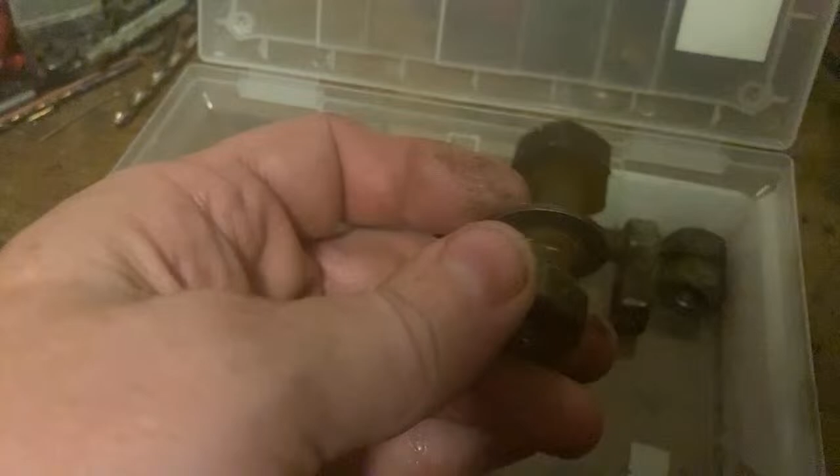These are - this is in Dan's million dollar storage system, must have cost him a fortune. I'll take it back to him because he's got a set of them now, I'll have to build in a shed. But this is BS 109 Whitworth from before World War II.

This one's smaller size - that actual size is 7/16 Whitworth, which is the after World War II spec. This is the more modern size on both ends. This one's something completely random on this end, and the normal modern size on that end - no idea what that is. These are just ordinary Whitworth nuts. These are standard both ends.

So none of these bolts and nuts really add up. So what do you do? Do you sit down and make them, or do you put modern stuff in all through and say that's good enough, or make it all match, or do you persevere with what's there? I don't know, I don't have the answer.

My OCD kicks in too, I can't handle that. I really don't have a plan, but I could spend all my life just making bolts, because this isn't the only part that at the moment needs new bolts in it. There's a lot of bits. I've made a lot of them - I've got spares that I've made sitting here in different sizes all over the bench.

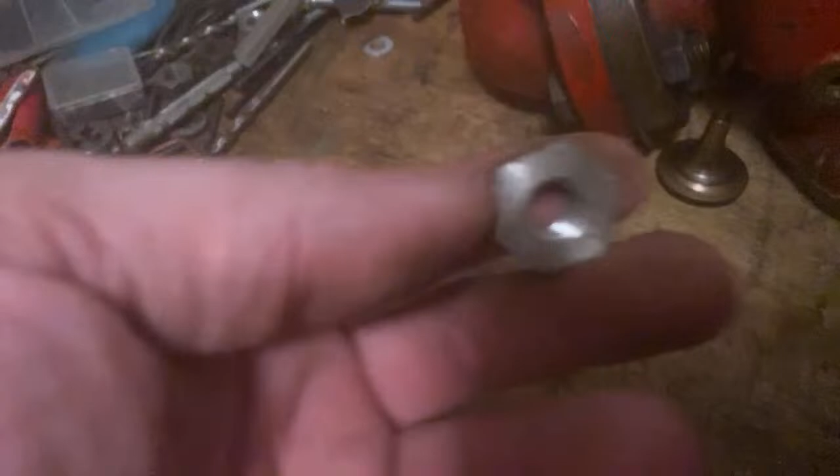This is the same as the - see this is 7/16, no, the 7/16 Whitworth and the BS 109, the old pre-war size. Hey Randy, hey Dan, we were talking about you, not to you. It's all good. So, and that's to demonstrate the point.

Have a look in Dan's million dollar storage system - you're missing one of these containers. That's what size that is - see, exactly the same.

But the thread's bigger in the middle, so they don't match. It's 7/16, that's what they should be. There's no 7/16 nuts on the rollers - they were made by mistake for something else. I don't think there's very many anyway, I've got plenty of them. But all these are 1/2 inch, so there's nothing on here that's really the same. A bit of a problem.

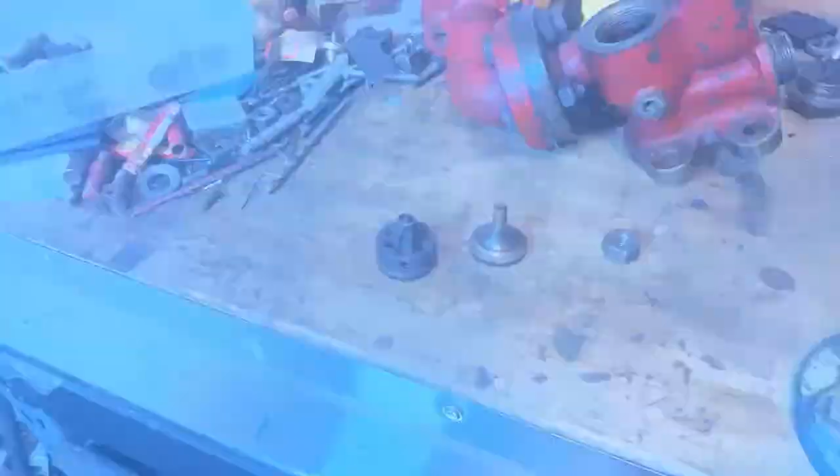Anyway, we could fix that. The issue is these - I'm going to find some light because there isn't any. Sorry guys, you're in the dark. Try that. Try that.

There's one seat still in here, and I've got to pull it - a bolt through the middle of it to pull it out. It's moved a bit, but it needs more. Haven't pulled it out yet, but this is the seat out of this side, which is the delivery side.

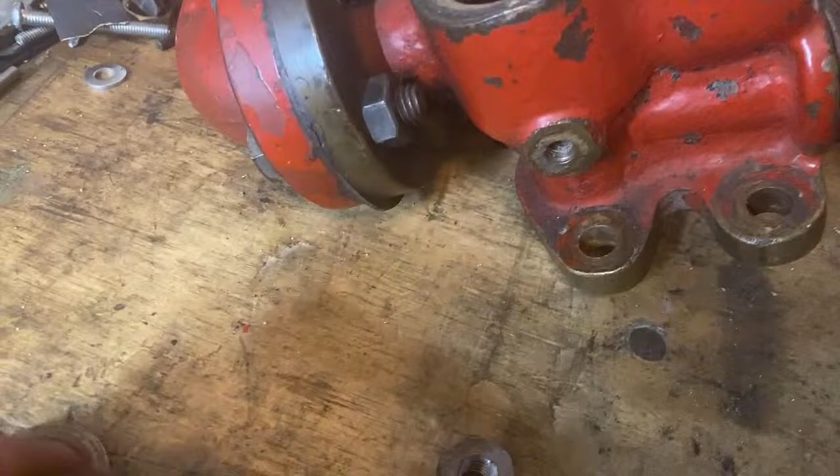It's retained with a bolt, or supposed to be, through this hole where it goes in - drops in there, and then that bolt. The bolt's supposed to look like this. This is a genuine one, thread tape and all.

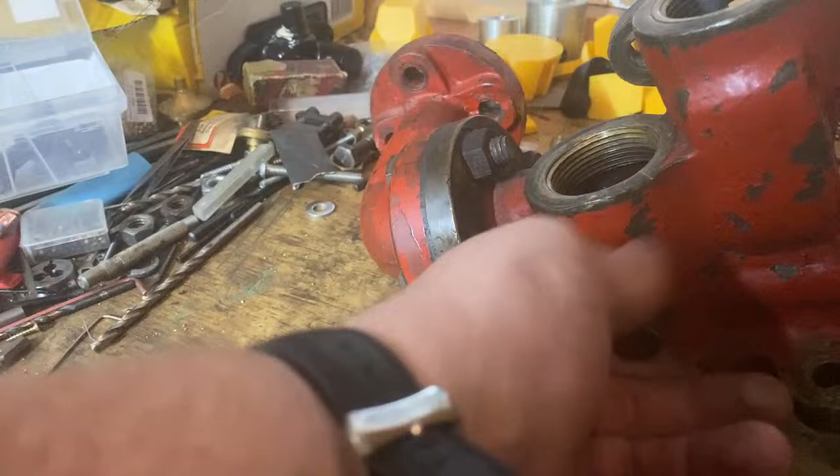What it's got is a broken off Whitworth bolt with the end chopped off, a different size head again, because no one can get this right. So I'm going to have to make one because this one never had anything retained in it. I don't know whether it's Loctited in, silver soldered in, tight, or knurled - don't know the story. Anyway, got to fix that. Make 2 of them for a start out of brass.

Now, the issue with these, if we have a look... there we go. If you can even see this. But the issue is that they rock on the bottom there.

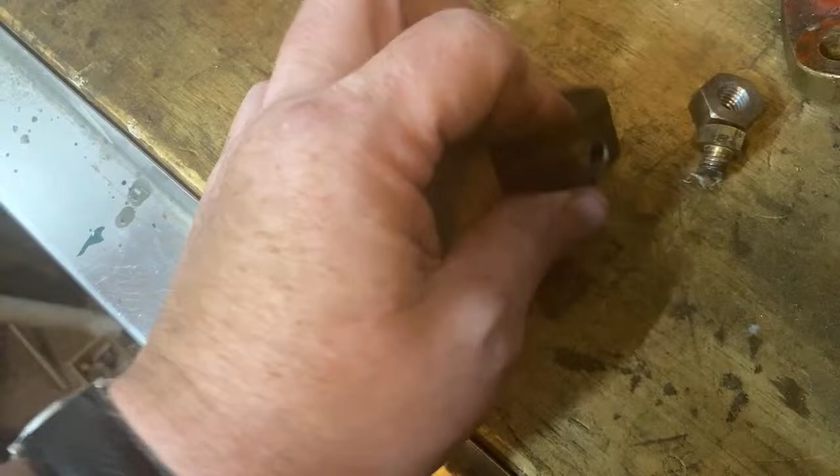So they don't actually seat properly. They sit on the valve seat in the housing on this curve here where they've been banging before they actually touch the seat. So this hole here, and this hole here - completely shagged out, completely worn out.

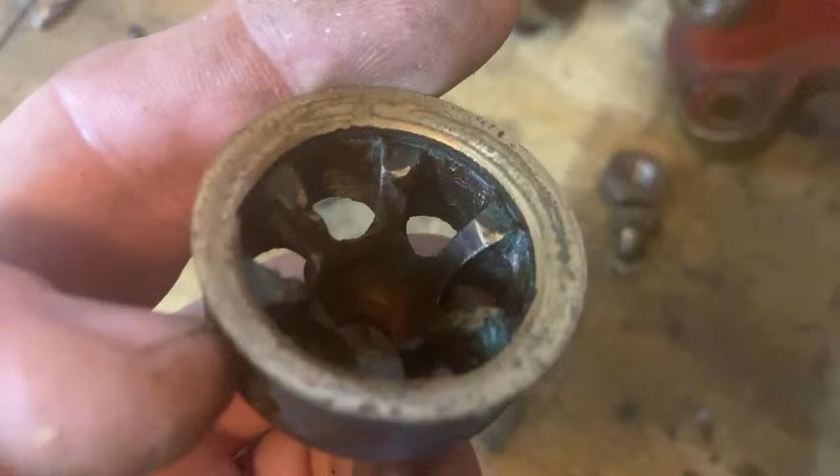Don't know if these are original or not - they could easily be, or might not be. According to the drawing this should be 1/4 inch thick on the end, and it's only about 3/16. Depending on which drawing you look at, it says it should be 9/16 high, which is about what this is, but it's flogged out - it's been belled pretty seriously on the bit that sticks up above the seating. So it's just been hammered for 100 years.

And the thing goes all the time - the steam and the roller's going, so it gets a hard life. So you need to get some bronze and make them up, two of them, and two of these, which basically have a fancy seat in the front top there.

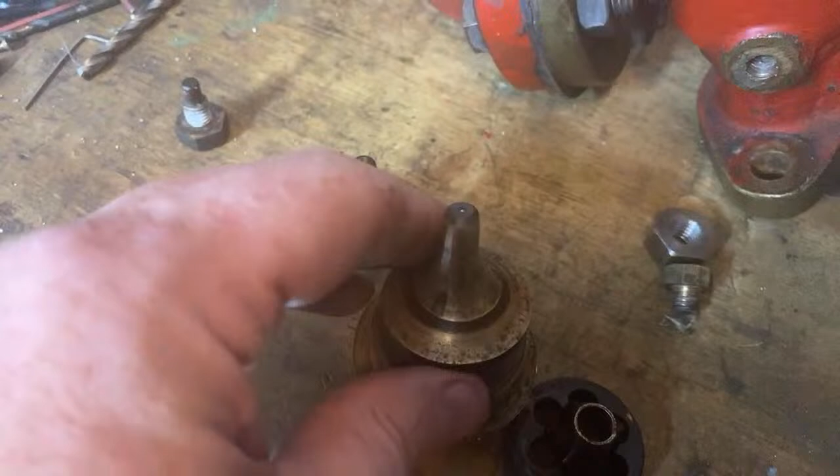So, this has this fancy bit on the end, which everyone needs, and very unlikely that everyone wants. But this is the stop - it stops it jumping up too far, stops the valve opening too far. And that's a fit on top of there, which is all very flash and nice.

As far as I know, I haven't seen them available in the UK. Heritage Steam Supplies might have them, but the catalogue's this thick, and I've leafed through most of it and found everything else - a lot of things I'd like that I'm never going to have. No point looking there because they're really expensive, hard to get, and postage freight's expensive.

I think we're going to make these new ones out of bronze. If we look at this drawing - I know you're all keen to see the drawing - here we go, this drawing: 41S54, drawer number 350.

I haven't yet, Dan, because it hasn't turned up. John Fowler and Co, Leeds. Feed pump and clack box for D1 engines, which isn't the right one, but it's close.

And it's not close enough, apparently, when you look at it closely. It's got a place here for rough tool and finish tool, doesn't say anything about that. John Fowler Company stencil, second time, and the drawing number on this end, so when you're looking in the drawer you can find them.

Yeah, this is for a D1 roller. I don't know why, but the D1 roller and engine had this pressure pot on top. That's a bit strange - I'm not sure why that is, but the rest of the bits are the same.

There's the proper tap profile - top here and side there, proper tap for the priming tap. This atrocity in here is the seat and valve drawing.

If you can decipher that, you're doing a lot better than me, because I can't. Anyway, I've had a good look at it, and a bit of a think about it. Anyway.

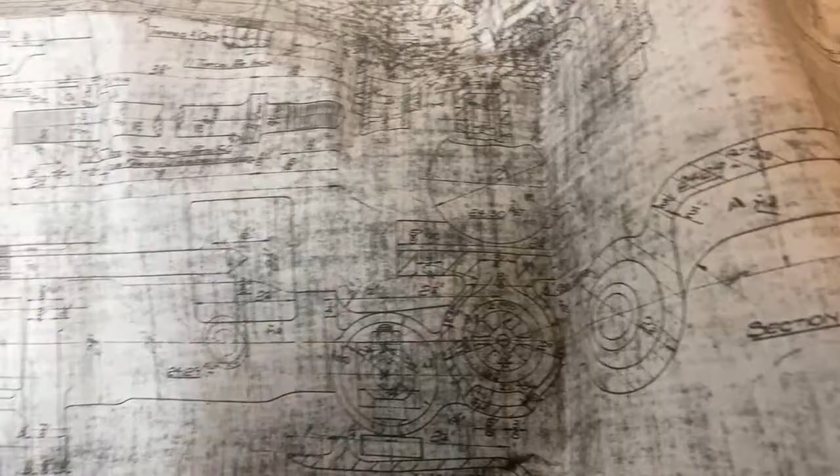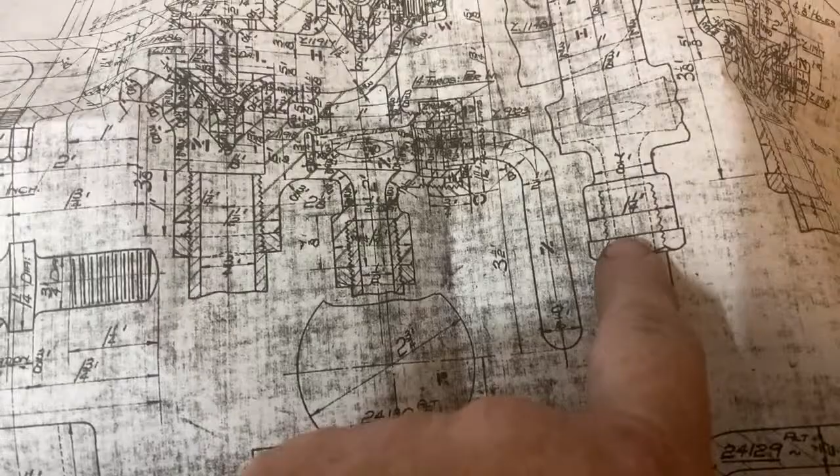So that's that. The D1's a bit different too, and there's quite a lot of differences amongst them. This one's got nuts and lock nuts and threads to connect the pipes in the bottom, in 3 places. Whereas mine has 2 flanges, which were very ugly, and we need 2 new flanges to match that, I think. And a flange on the back. Some of them had a flange on the front.

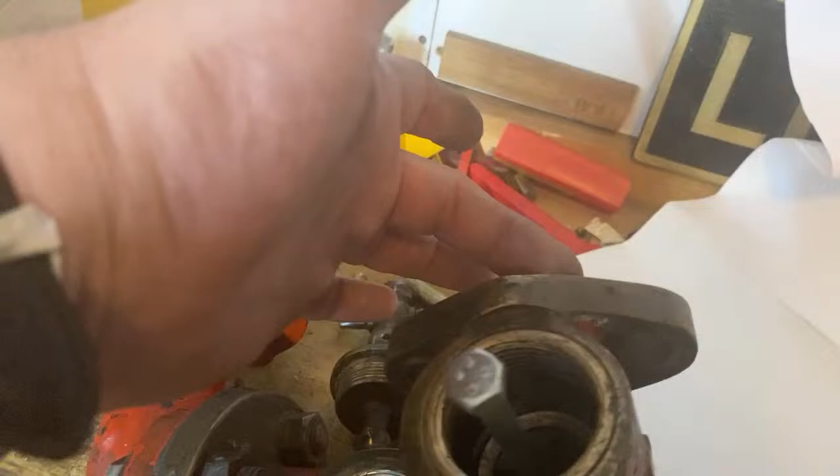If you look at Mark's, I've already got them drawn up, Mark. If you look at Mark's, the flange is on the front here, and this locking retaining screw is in this side here, or in this side probably. Now there's a passage there, so it's in this side, I think. And this bolts directly onto the back head pump that way, with the pump going that way. And then the flange on the front, I believe.

On the roller, this sits outside the foot plate, so the pump bolts on here, and the plunger's on here. Now this seems a bit strange, because I was always taught that the pump works better with less dead space in it. So having all this water in here pumping to the valve, pressurising every time and compressing, you would think would minimise the usefulness of the pump, but it doesn't because it's got this elbow on it.

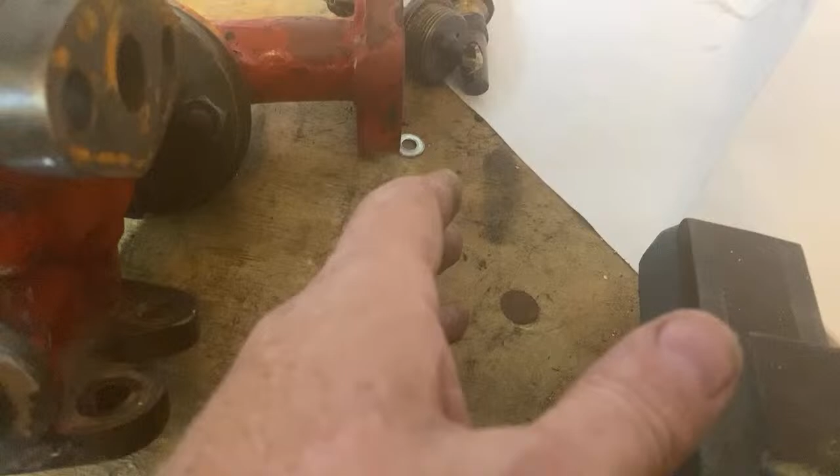So this is outside the tender, next to the gear guard. That's how that works. And this pipe here runs down the side of the gear guard. Some of these, and there was one on Facebook this week, the guy was looking for this elbow until I pointed out that it probably never had it. And when you went looking at the drawing, it goes this way on the pump. And where the gear guard is on the side outside, there's actually the diff lock control from the cab, which was another optional extra. So there's 1,000 different ones. Anyway, so that's that.

There is a bypass valve here, which seems to be in pretty good order, really. That'll go back together. That goes in there. Right, and this is off and this is pumping, basically. I'm sure you all know all about steamrollers, but what it does is when this valve is in that position, it pumps up here and pumps back down through there. So this valve's actually open in that position. It pumps through here and then into overflow in the tank again. So all it does is circulate.

When you close this so that it doesn't circulate, it actually pumps against the steam pressure and against the clack valve down on the boiler. So it pumps out of here and then out this one instead of out that one. And that's what controls your water flow. So that's all very exciting. Anyway, there's 1,000 things this needs, none of which are particularly easy or fun. And some of them are less important than others.

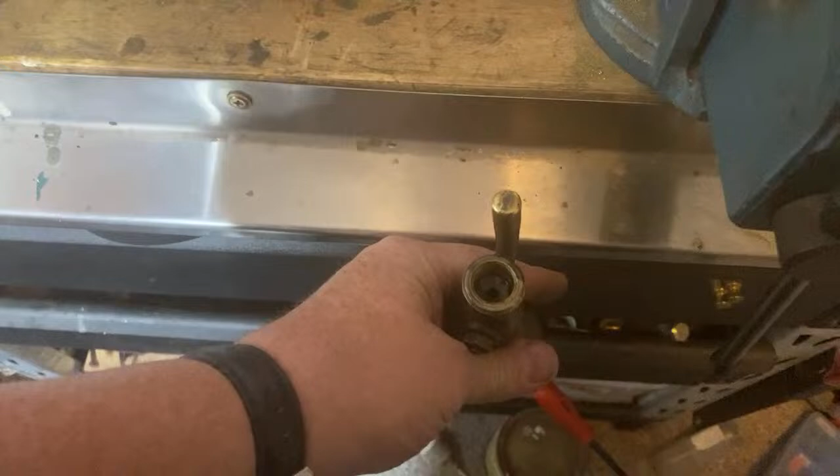This has just got a brass plug tap on here, which is fine, but it points straight up. And the position of that under the steering wheel is about here. So it's nearly guaranteed, trying to prime the pump, that the person who's steering gets wet. So I believe this should have a valve on this side and then an angle this end pointing out off the side of the tractor onto the wheel. And I think that fixes that issue. But whether that's going to ever happen, I don't know.

So that one screws in there. Now, the drawing doesn't say that this has got copper washers in it, but it must have had a gasket of some sort, so we're still thinking about that. Probably copper gaskets would be the best thing to seal these down, because they had thread tape in them and that's a bit miserable. Too much thread tape in water pumps isn't real good, and everything's got thread tape on it.

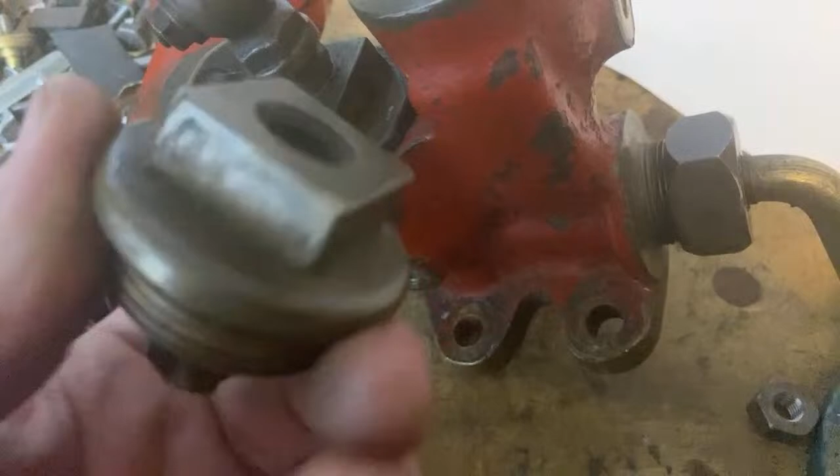So basically that screws down there, and you've got a priming tap so you can open it and remove the airlock. It used to have a chrome laundry tap, so this is much nicer. But I'm feeling like it either wants an elbow on it or it wants fixing properly at some point. So this is exactly the same part here. Now, Mark and I were talking and realised that the clack valve has one of these on it too, which is also exactly the same part. It looks factory identical. So this part in the clack, and two of these, one above the other.

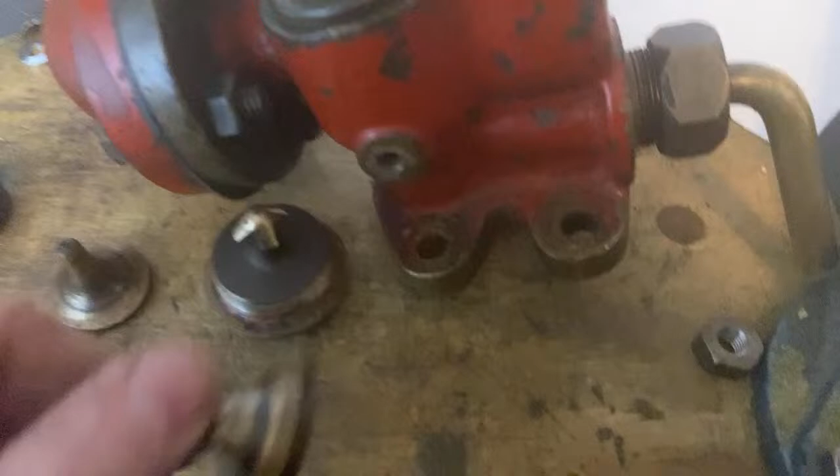Probably going to do the unforgivable and mix these up now. But the clack valve has two of these, which operate one at a time, and one of these on top. So I think they're identical parts. However, they may be identical parts for this roller, but they're not identical parts across the Fowler line, because the D1 has quite a bit different seats and quite a bit different one of these. It's a different diameter in here. And it's a different thickness here.

The clacks probably have it out just exactly the same. We'll get these done first. I think copper gaskets are probably the go. They're just not listed on the drawing. So there you go. There's 20 minutes of very exciting insight into steamroller water pumps from John Fowler and Co. in Leeds.

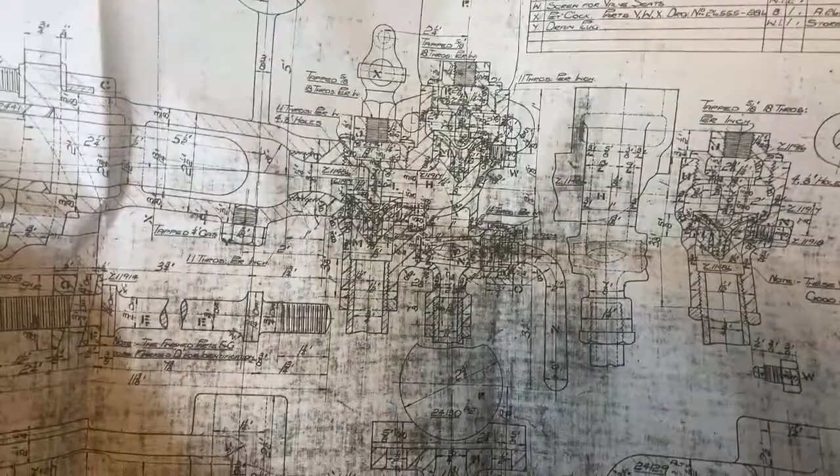And there's a whole assortment of drawings that I have access to. Most of them are about that readable. So we're still looking at that. There's the seat there. There's another view of it and the valve on top of it. But this is a different seat. Absolutely, it's got a different piece on top there. It's a different shape. Can't say it's a later model because this drawing is 1925.

But it's a little bit different. And the D1 was a different range of engine. I don't know why they didn't standardise pumps. You would think that all the pumps would be standard and you just pick one off the shelf and bolt it on. But that's not how they did things in the Victorian age in England.

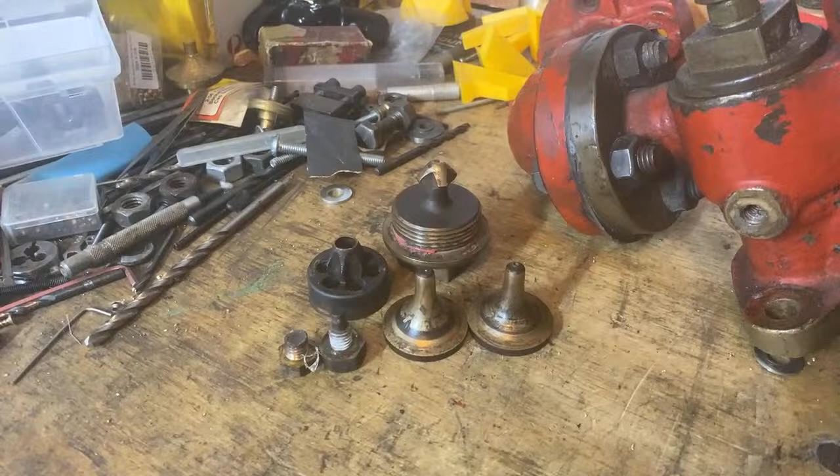Like Cole's funny picture book. There's you understood the fruit was cherry. A apple pie, yeah. B bit it and C cut it and D dealt it. I can't remember what E did. F fought for it. Anyway, you understood the fruit was cherry. Not that that's relevant at all, but there you go. Completely irrelevant.

Anyway, that's the pump, and that's where we got with that. So some of the wasps are probably too big to fit in the pipes. That's very true, but they're going to have baby wasps, and that looks like a fairly good hole for them. So, anyway.

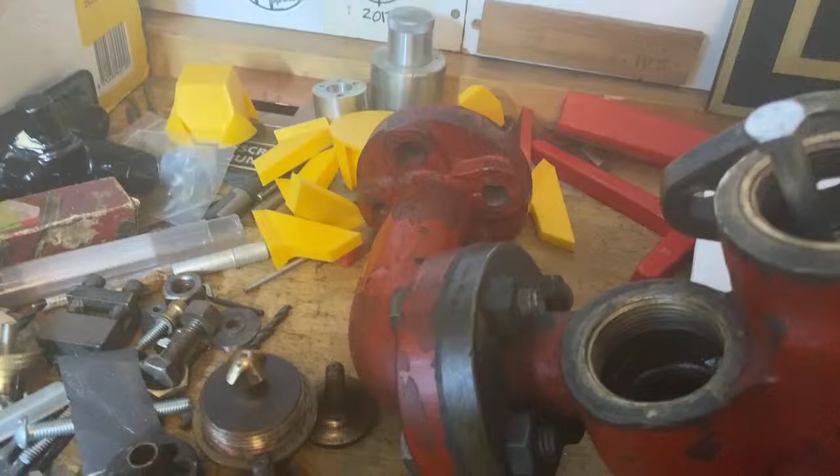It doesn't. The bottom of this seat comes into this hole. So this is the space in the top that pumps. Now it's only open to the bottom here through this one, only when the valve's open. So when the valve's shut, it pumps,

it pulls the water through this one and then pushes the water out through this one. That's how that works. So this one in here sucks the water through from the top, opens the valve. Right, when this plunger comes back, this pushes down on the seat sometimes, but it doesn't at the moment, and lifts this seat and pushes out through the top.

If the bypass is open, then the path of less resistance is down the side here and out through here. So there's no actual passage right through, so you can't just get in the back and punch it out like I did that one. I just gave that the brass punch. It fell out. So I'll put a bolt in this one, and I'll put a plate across it, and I can screw it out. But you've got to hold the 8mm nut on the bottom.

So we either need a spanner, or to weld a piece of 6mm rod on the side, which probably works. That might be an answer. So it doesn't turn, or I don't know if it does work actually, because if you get it so it doesn't turn, then it's probably not going to come through the hole and you're going to bend something. So probably the best option is to get a bent spanner that goes in there and holds it so that you can jack it out. So that's the plan for that.

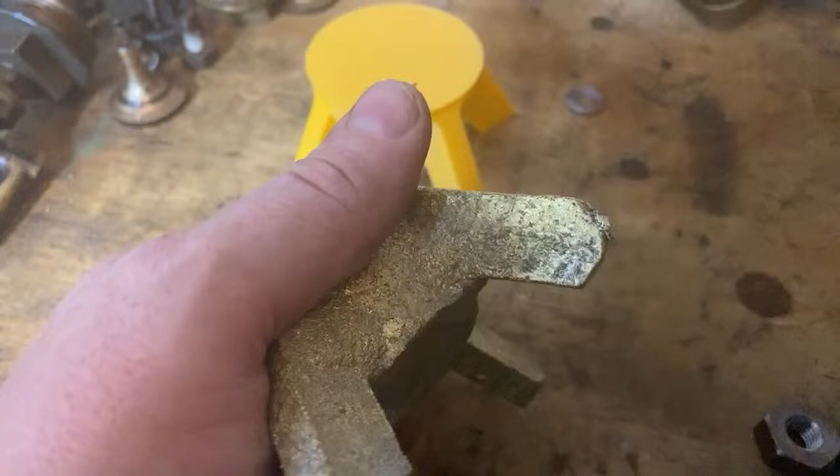Right. Dallas cast one of these at the foundry. And it's sort of alright, but it's very, very ugly, to be honest. And it's not helping steam flow or anything. It looks ugly and it looks heavy, and this is a much nicer looking thing, but even that's way over engineered, I think. And it had some sand wash out here on the bottom corners. So some of these are really sharp corners, 2 of them, and 2 of them not so much.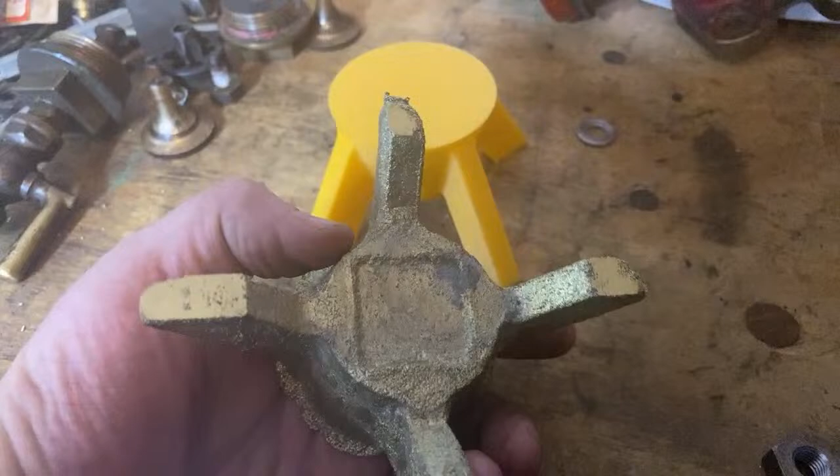And it's got this funny shape in the bottom where the pattern fell in, and there's a fair bit of clean-up work on this, and you machine this back down and drill a hole in the centre and stuff like that. You've got quite a heavy casting. It's probably half that weight when it's put together, but I haven't attempted that again. I did try and pour one of these, and I left it on the bench up there. I hope it's still there.

Got to go and get some patterns. Yeah, we're getting that, Mark. Yeah, thank you for the reminder. Yeah, we've got them here.

So, this isn't the pattern I use. This is a fairly ordinary 3D printed pattern with some layer shift issues and things. But this one hasn't got any shrink on it. The full-size pattern does have a bit of shrink on it, and it was about right because I went up and moulded this up.

I've got a slide hammer. I haven't got a slide hammer that takes an 8mm bolt. That's where I'm at.

So this is the one, see, if we look at that, this is the one with 1.6% shrink or something. So that gives you some idea how much shrinkage there is on that. Gives you some idea how much bigger the shrink one is than the actual job.

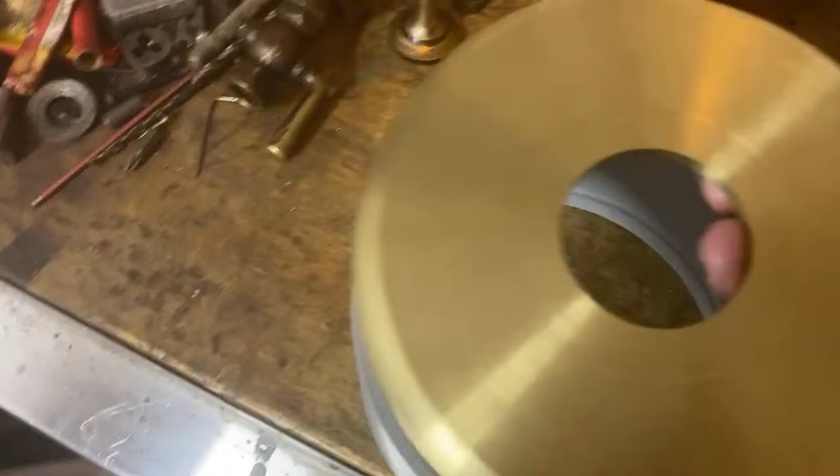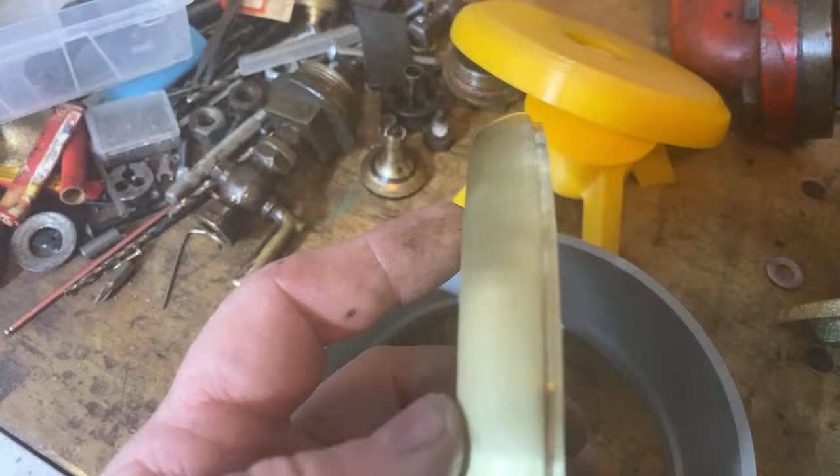So here we go. Look at this. We've got one of these, which is very nice. Right, which is exactly the same, shrink and all, really, as down to size and everything. So we cast one of these. As you can see, I've machined a shoulder on the corner there. And when we get this piece made or cast or whatever we're going to do, we'll machine a shoulder to match on the inside so they fit together.

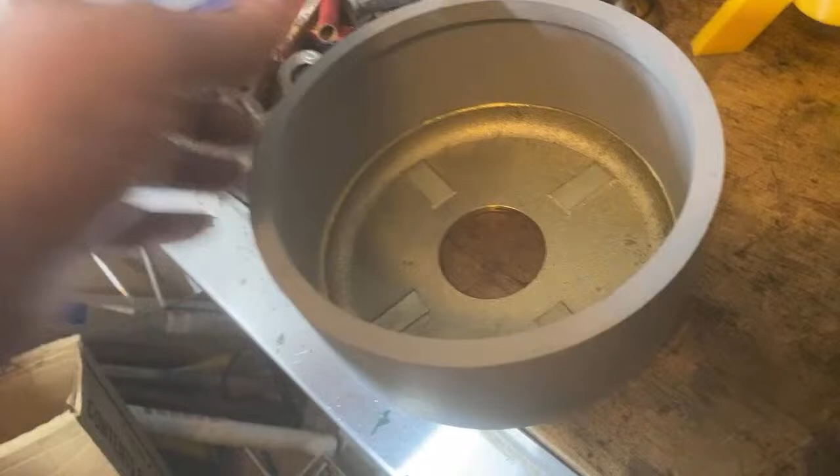And then we'll either silver solder these two together, or we'll run around it with a TIG and some brazing rod, something like that. TIG braze it, or TIG brazing is probably easy, except I'm not fluent enough to TIG braze. I know people that are fluent with it and pretty neat and tidy, so I'll get them to do it. So that gives you some idea of the shrinkage on that, because the pattern was the same size.

Mark talks it up, but I don't know. I've done enough TIG brazing to know that it's not a fun thing, and I reckon I'd be lousy, I haven't done any for a few years. But I know someone who does it all the time. We can give Mark a try, and there'll probably be 2 of these in the end, so he can do his. But rather than put someone through the stress of actually welding this up, I think I'll get another mate who's pretty good with these to do it.

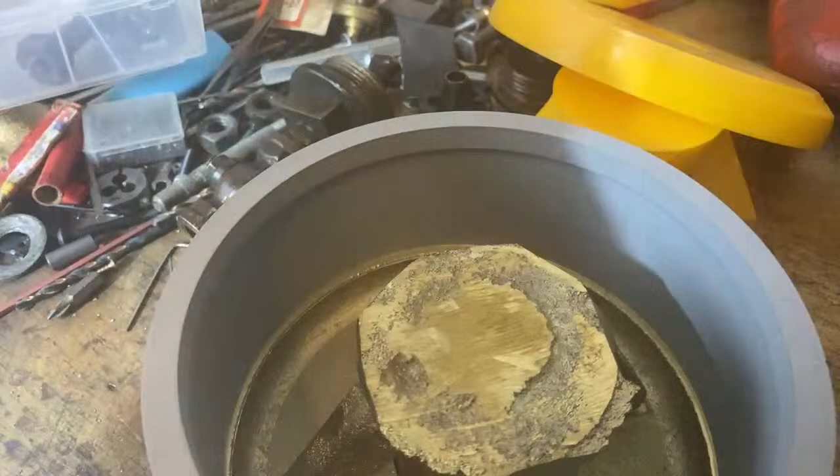So this goes on here, and this with the four pegs here goes in there, right? And then this is machined to match and concentric with this, and the reed plate goes on top with a 16th gap or something like that all the way around, and then there's a bolt down through the middle, like a big stud that screws the reed plate in place. And then the bell goes on top of that, and the nut on top of that. So that's how that works.

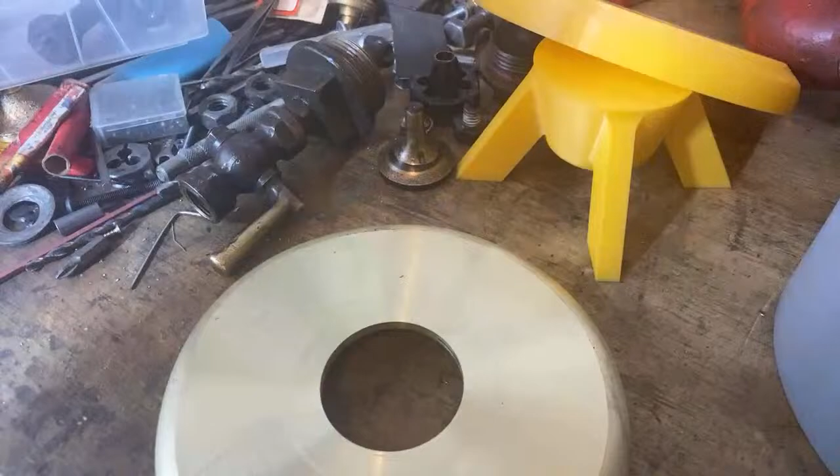So there's a valve goes on the bottom here, and that's probably the next bit. There's going to be a split casting with a core in it. Core's about toilet roll size. So we'll just use a piece of cardboard carton or piece of PVC or whatever I can find to make a silicone core, and mould both halves, then lift them out of the mould, put the core in place, put the top of the mould on it and pour that, and that should mean that we're not cutting out 1 3/4 or something in the middle of wastage.

It's going to take 2 days to do. So we can just set them up on the hexagon and bore it, hopefully. And then that can be either welded around the top or around the bottom. And threaded on the bottom, and then there's a seat and everything for the valve, and there's an opening in the side for the lever.

The lever needs to be laser cut or something, probably is the easiest way. You can cut it out of plate with an angle grinder, but I've got to get new flanges for this. Several other bits need to be cut, so we'll get this done at the same time, the lever and whatever else needs doing. Get someone to plasma cut them, whatever.

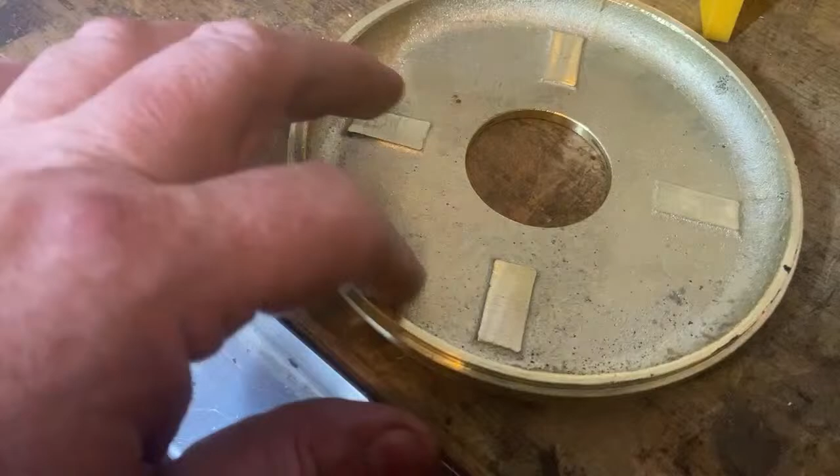So that's progress on that. There's actual progress. There's an actual part that's starting to look like a part, which I'm really pleased about. And this is a really nice casting. It's finished up pretty nice. Poured in here pretty good. It's the second attempt at this. The first one collapsed. Put the top back on the mould and it just fell in. So when we poured it, it had a big hole in it. Not good. But this one's run beautifully and we've got a really nice casting.

There was a fairly big gate on here where the metal poured in, and then we just put a series of air vents, like bike spoke size, into the top of the casting so that the metal flowed all the way to the back and came up through. And a big gate on here, which I've actually machined off on Tuesday afternoon when I got home.

So what I did was set this up on the inside here, because this is a good finish, in the four-jaw, and bored this face at the back. Then set that up on the outside of the three-jaw chuck, nice and tight and firm, and flat against it, and machined this flat and machined all this edge, turned it round and machined this radius on here. So everything's cleaned up pretty nice, pretty happy with that.

So that's that. Pouring this is going to be a fun thing. I don't know really the best way to do this. Probably we could put, it's not on the drawing, but probably we could put a little bit of draft on here on the inside, facing up to the top towards this lip, which needs to be machined.

I'm still not feeling that. I mean, while you'll pull it out of the outside of the mould, pulling it out of the outside without the sand caving in and still being able to clean it over, because when you tip this over to clean it out, the middle here being not particularly well anchored to the rest of the sand, just falls out. Then you've got problems.

So casting it, when you do it in 3 bits and then make a wooden mandrel and some tie wire around it and then weld it in 3 bits and then machine it, that might work, because that way you've only got sort of that much depth and you can lay them down on their side and do like odd side box. So if you're casting, say, that much of it, a third of it, you could sit that in a box and then

put the sand in nice and tight on top of it, turn it over, clean this out, and then put sand in nice and tight on top of this, with a parting line, so that when you lift the top off, this piece in here lifts off as well. Then when you pull the pattern out, you've got a gap there.

Would it roll down? No, it's not cost effective. That's the thing. Because a piece of brass that's 65mm wide and 3/16 deep, and then you're still going to make a ring to go in it as well. This bit of brass for this is going to cost me $150, whereas there's probably, seriously, $10 worth of scrap brass in it. And if I stuff it up, I can throw it back and use it again.

So I don't think that rolling it up's the answer. I thought about it pretty seriously, and it'd probably be alright, but getting the diameter and everything right with the nice round ends and nice and uniform, I'm just not feeling like that's a good idea. I've thought about it, not feeling it. So, open to other suggestions.

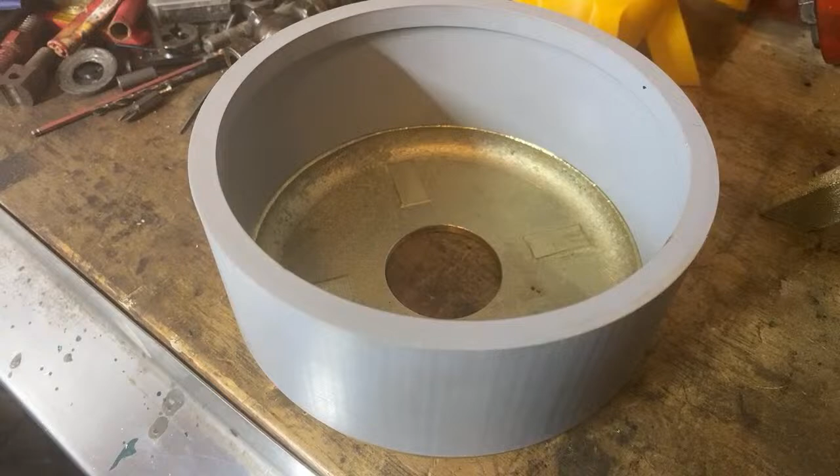You could pour it open, yes. However, a bit less controlled, to be honest, to pour an open mould in brass. Yes, it will sort of work. You've got chill where it goes around corners, it's a bit more extreme, things like that. I'm not sure I'd like to try it, not on this casting.

It's very easy to make a box, just mould a box on a square so it's flat. I put it on a piece of plywood so it's flat, and if this is all sitting up nice and flat and level, you can just drop that piece in. But what you do is put the core in, put the pattern back in, mould the box on top, and then you've got the right shapes and everything. When you pull it apart, you can see where to put gates and things.

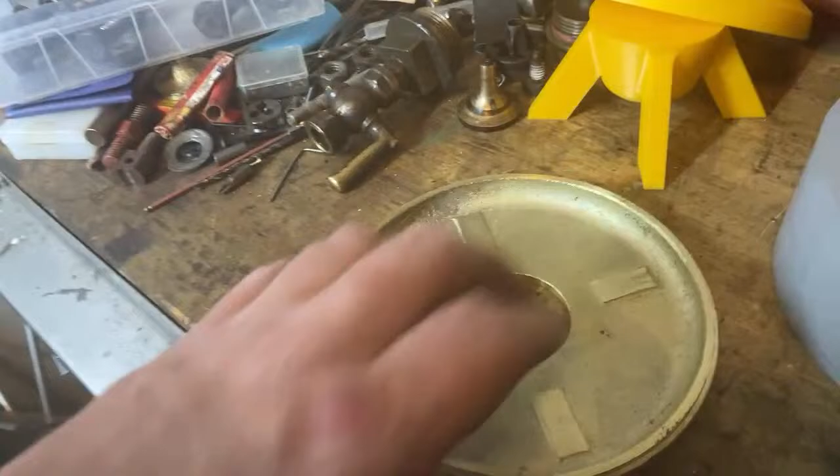So that's where we're at, that's sort of the next job. Probably it's not actually, probably the valve's the next job because that's a very easy job. It's the fitting on the bottom. It's a fairly easy casting and we can make it. It requires minimum machining, so we might do that next.

Got to find a piece of cardboard tube for a core so I can measure it and make the pattern with the appropriate size core prints. There you go. Probably I've got something the right size here, like probably a box of these, which is a mailing tube. That's about right. Probably just cut a piece of mailing tube and use that. A piece of PVC pipe might even be better because it's smooth and the core comes out a lot easier. Split it down one side so you can separate it, or split it in half and put some rubber bands around it.

So that's that job, that's the things that are going on. I said I wasn't going to start this, it was just going to be a concept. However, there you go. I'll get this bottom fitting and all the bits made, the valve and the reed plate and the outer housing and the stud and stuff, then we can think about the difficult bit, which is the bell. Oh crap.

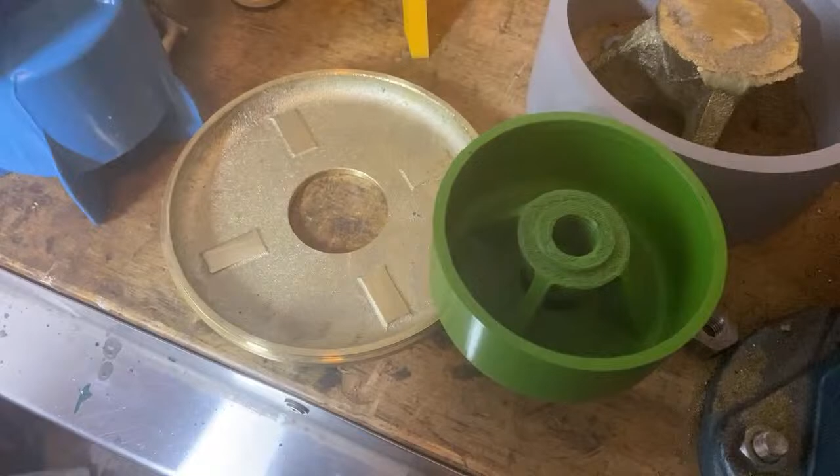This is 1/6 size, so you can sort of see the size comparison there. 60%, not 1/6, it's 60%, so that's 6/10 size. So that's the fitting on the bottom with the gap in it.

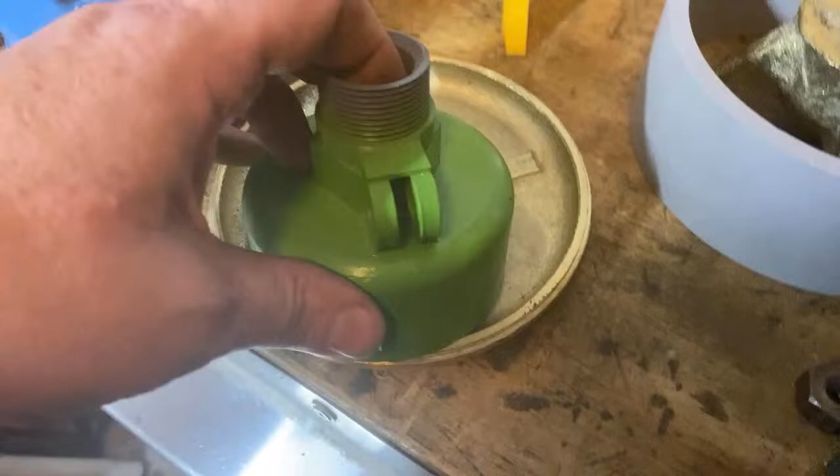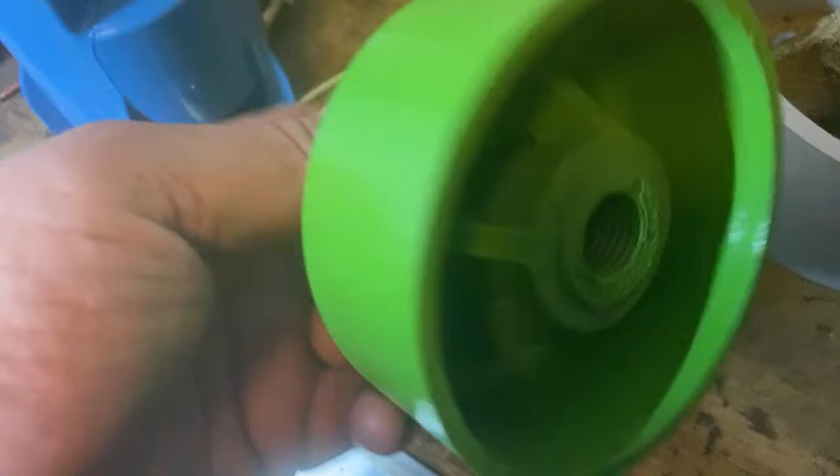Not going to bother putting the gap in it, I'm going to machine this solid with the core through here. I'll cast it solid with the core through there, and then we can grip this in the 3-jaw hopefully and machine all this nice. Set it up that way, or set it up nice and flat, bolted down or something in the vise, or even this way, and we can machine through from the top and put this in here before we weld it together. Then you've got a nice square gap, and less problems with chatter and stuff when you're trying to hold it and machine it.

So anyway, after that is this bit, and that's going to be the challenge, right? Because this is 6/10 as well. But there's some interesting challenges in that. I don't know whether we're going to cast it or fabricate it yet, we'll see how we go. Might have a couple of goes at casting it, and if it fails, we'll fabricate it. But that's one of life's little challenges, I think.

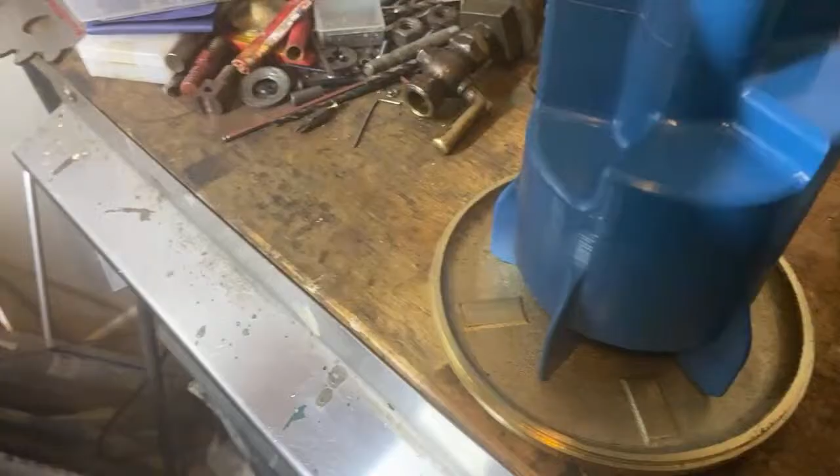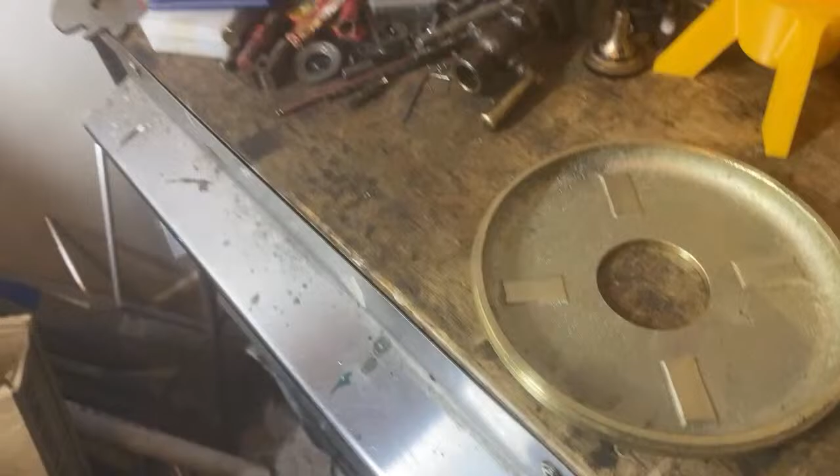Anyway, so we've got one of them. Called in and saw Mrs Mark's shed on Tuesday on the way up, because they live up near there, on the way back. She's done some very cool... what have we got here? It's fluff, don't think it's spiderweb, it's fluff. She's done some shirts with an embroidered patch on the front and an embroidered patch on the back, which is really nice. So pretty happy with them actually, pretty cool.

So that's another thing I picked up on Tuesday, pretty excited about that. So I got some work shirts, they're only cheap Kmart shirts, but comfortable tees. That's done, thanks to Mrs Mark Shed for that.

I'm interested to see if the 3D printed version would work too. There's quite a lot of metal parts needed before that happens, like a screw through the middle and stuff like that, and probably it would, to be honest. But probably not a big deal to get it to the stage where you can test it, and I might do that yet. So if we were to basically put the reed plate on, make a steel bolt for it, or even a bit of all-thread if we could find the right thread. I don't know if we can, this odd thread.

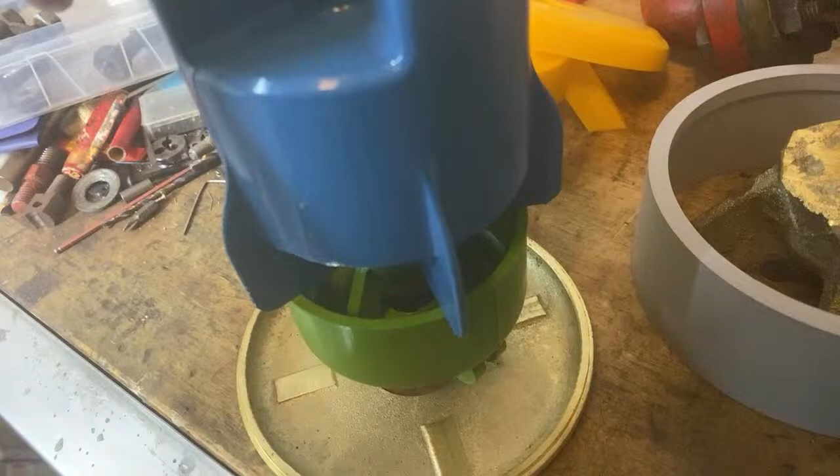Up through the top, nut on top. Then we could probably test this and see if it actually gives a note, which would be interesting. I'm more likely to do that because Dan's bought one from America, a little chime whistle, and that works fine, you can blow that and make a nice sound with it. It works well on air pressure, and I'm not sure on steam pressure.

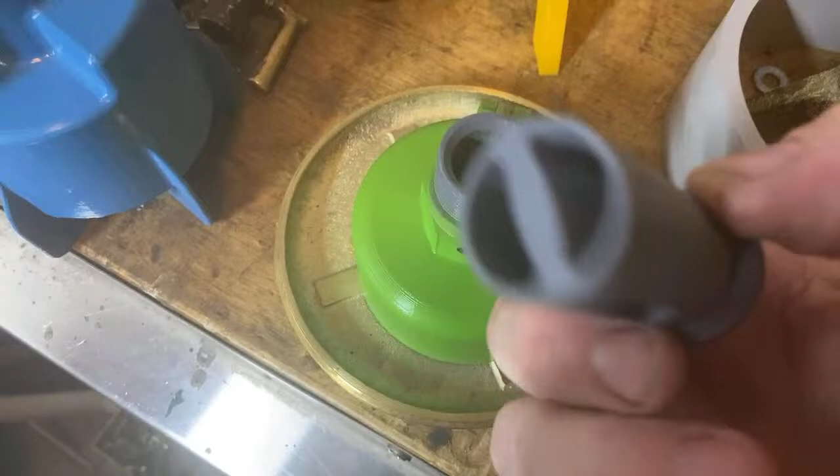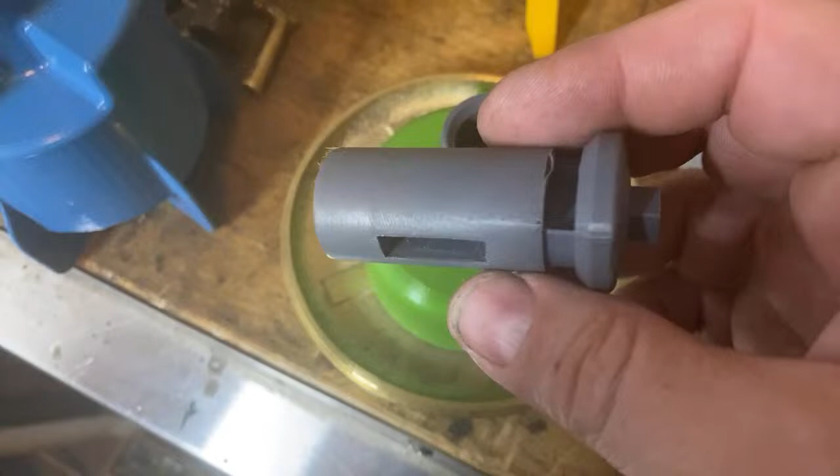Also need this bit, which is an interesting little casting. It's got some fairly interesting cores in it. That requires a little bit of thinking about, to be honest. Not sure. I think you make that in one piece with a gap through the middle, so you make a core box that the middle slides out of. So make this to fit the hole, with this piece in the centre, which is actually banana shaped on each side, so it's got a curve there and a curve there to clear that. So make that piece maybe.

So I'm not sure, I've really got no idea about this, but the steam delivery passes this valve here, which is the valve seat. That's what stops it. This lever in here works inside this slot, and that's what lifts it off the seat. And when it lifts it off the seat, the air or the steam goes past there, through there, and up through the top. So there's some little challenges in this as well.

And then this is just bored, and this is machined to fit with a 45 seat. It's got a square on the end to lap it.

So, not even sure where we're going with that, or what we're going to do, whether we're going to fabricate it up. Maybe that's probably the easiest. No idea. Take care, Paul.

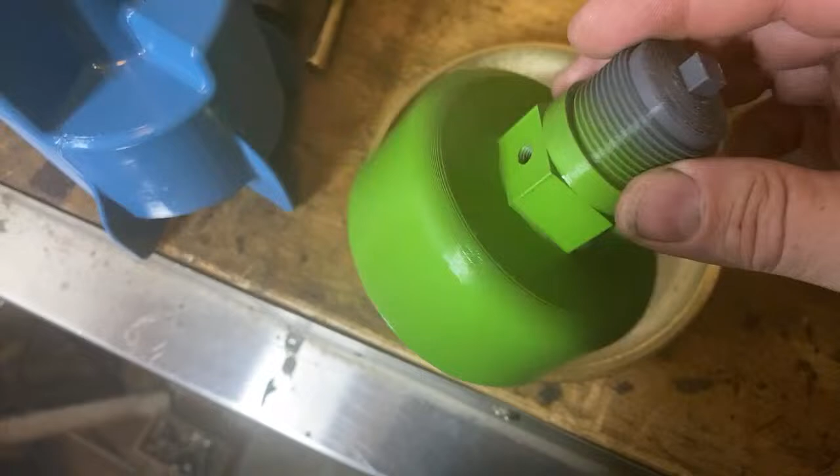Interesting. That screw there retains in that slot, so it stops it coming out or falling out or whatever. Limits its travel.

So, don't know. That's the genuine consensus on that. It's all pretty much suck it and see, excuse the pun. But got no idea. We'll see. But we're making a start because we've got a bit there that's made a good start.

If we can get this bit, make a decent pattern that actually works for this, and cast another one. Probably quite a bit lighter than that. I don't think it needs to be anywhere near that heavy. That's heavier than the rest of it put together. This is solid. And there's some really ugly edges and things here where it's all falling apart. So, going to have to address that.

What else? I've got to sweep this lathe because I've got brass everywhere here at the moment, where I've been making that, machining it up. Haven't done anything with that. I've got a toilet roll insert there that's about the right size, but it's about an inch too short for the pattern.

Haven't even looked at this, to be honest. I've got the castings there. That's as far as I've got. I'm feeling guilty because I didn't get in and do some on this because I really need to.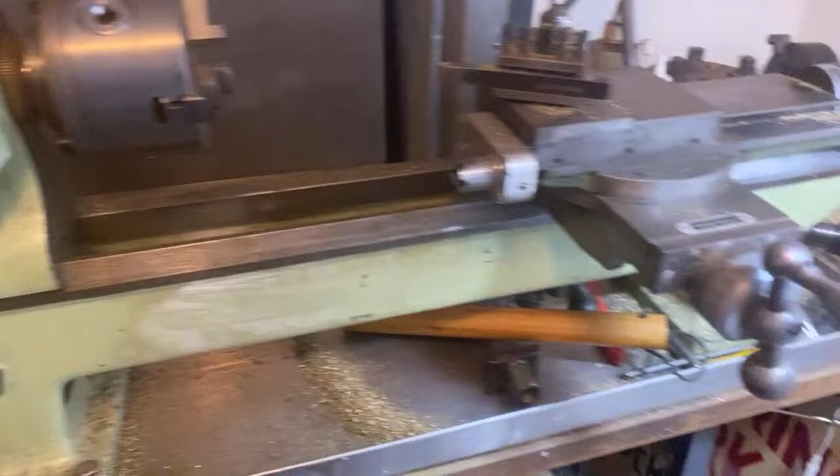Haven't even looked at any of this stuff much. This belt's done a bit of hard work on the machine, that casting, that's all I've done. Anyway, that's pretty well it.

Anything else exciting? Has anyone else got anything to share? Mark's doing stuff. Hey Mark, I forgot to tell you the other night, and I was going to have a discussion about this, but we never.

That date on the front rolls on my engine corresponds. It says March 26, which is 3 weeks or a month before the roller was shipped. So I'm guessing it is a date. And yours probably is too. So there you go. Interesting.

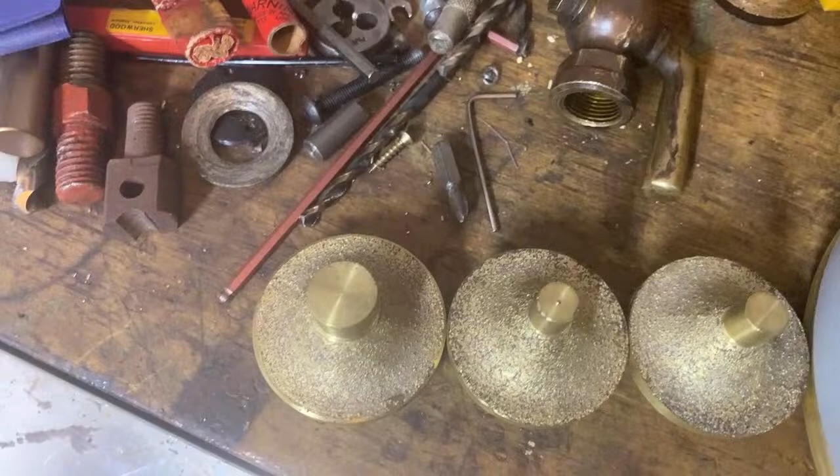What's the popping? No idea.

So I should finish them at some point while I'm doing it, while I'm in the mood, before I turn them into valves. That's brass, and it needs to be good quality gunmetal, the drawing says. There we go, 'use only' it says - I think it's a bit specific about that. If we look at the drawing, materials for valves, it has a fairly specific note. Here it is, there we go: these valves must be made of good, strong gunmetal. There we go, it didn't say anything about quality, it just says good, strong gunmetal - something with plenty of copper in it, I guess. So, there you go.

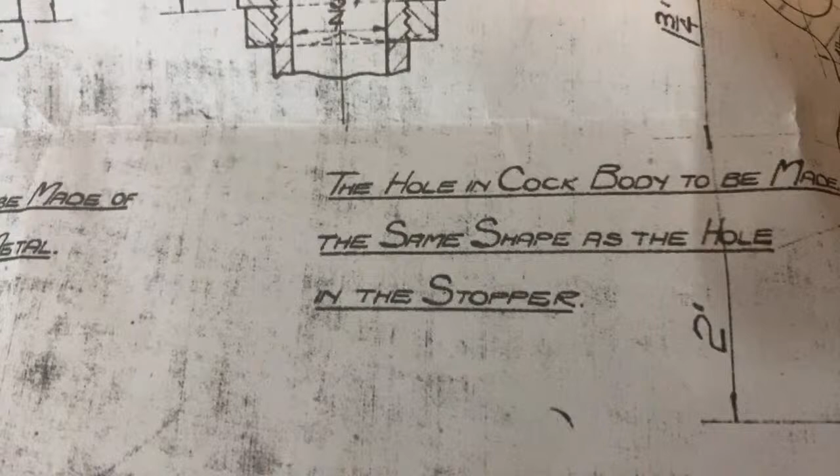If you wanted information on the angle of the petcocks and tapered plugcocks and this thing, there's that. "The hole in the cock body to be made the same shape as the hole in the stopper." That's exactly the information you need. That's all there is. That's what you got. That's it. They got a match. And I don't have the match from here to here to here to here, because when I pulled my drain cocks apart, none of them were the same taper at all, even close. So there we go.

So that's what I mean. I guess if we make a new valve for this at some point, which we might, I don't know if we will. I'm not feeling that as much as I should. We'll see how we're going for time. At some point I might make one. It's an easy job to change it over at some point in the future. But if that happens, then yeah, I guess we'll make them both the same and be done with it.

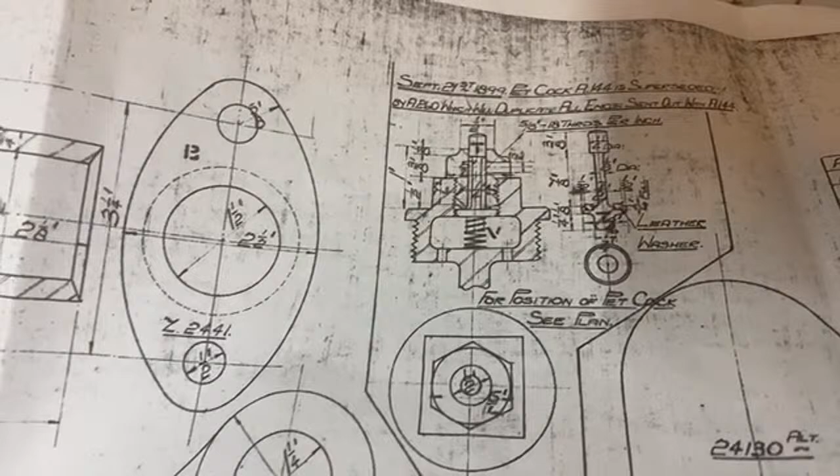This is an interesting thing for Richard Mark, and anyone else who's interested. This says September the 21st, 1899, there's a note on this drawing. It says petcock A144 is superseded by A260, which will duplicate all engines sent out with A144 or R144. So

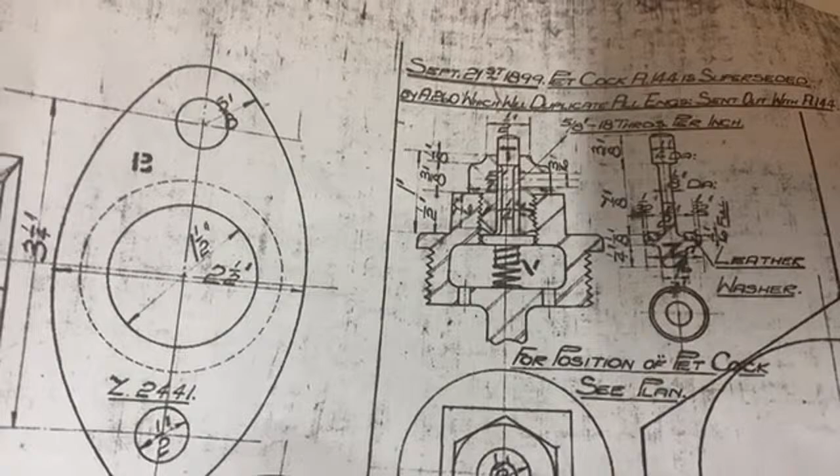there's this jigger here, which is actually in the top of here where this valve goes, right? Which is spring loaded with a button on top, and when you push it in, it lets the water pass and it shoots out the side there. That's very cool. But it's an auto closing priming valve. Not sure how effective it was or whether it leaked or what happened, because they've changed it. But that's what we got. It might have been a bit difficult to use.

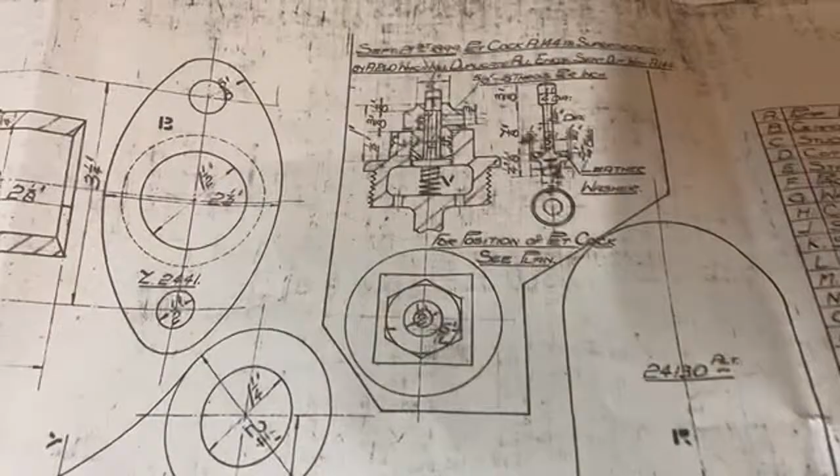It looks legible up there and it's quite good. It's not legible down here where this is. At all, even a little bit. I can see measurements like this one here says 1/8. Absolutely no idea which bit of it's 1/8. That's a bit of an inlet. This one's a 1/8 too, but it still doesn't give you the information. This one's 3/8. I think that applies to wall radius on the outside of the casting, which is irrelevant.

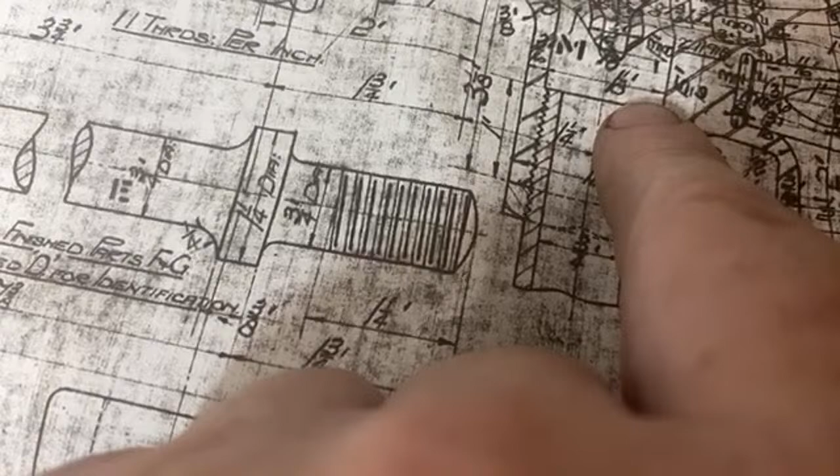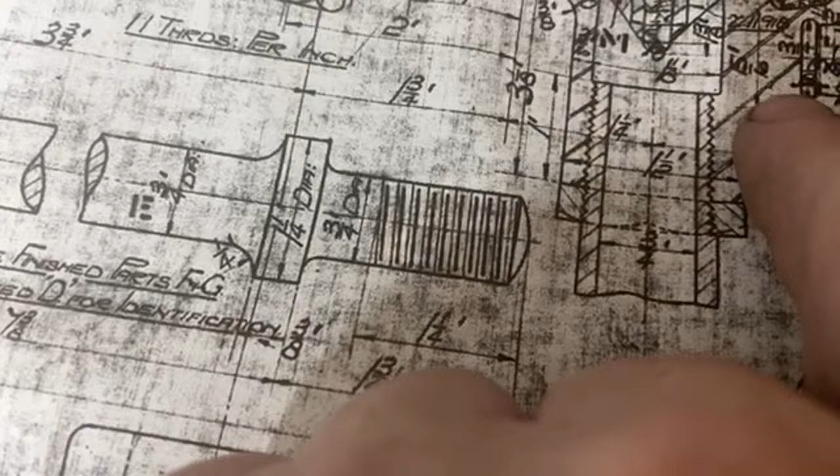These are pipe diameters. This is the main inside, I guess. No, not really. That says 1/8 inch. Well, that might be right. It might be 1/8 inch bore. This here is 1 5/8 or 5/8 or something like that. No idea what any of this is. No, that one definitely says 5/8. Probably. Might say 5 1/8. I think it says 5/8. But that might be this measurement along there. No, that's 1.5 inch. Got no idea. I have to sit down and study it a bit more.

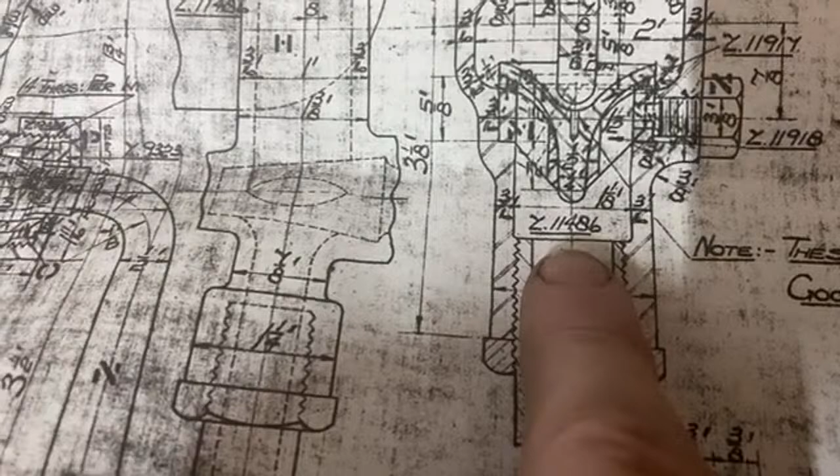And this view of it here with the rest of the information on it is no better. It's got part numbers on it. It has got a drawing number there. I believe that to be a drawing number. So if anyone's got drawing number Z11486, I'd be very keen to find out. Anyway.

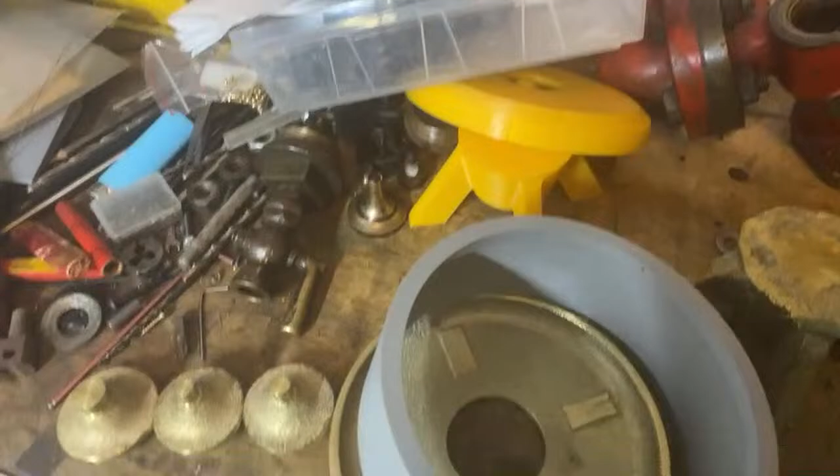Wildlife? Where was the wildlife? Anyway, so only wildlife in here. Anyway, I think we'll call that a win. Chickens. There's the chicken scratch, all right.

And there'll be more progress on all these things, I hope, next week. Should have that seat out anyway, and probably give that a scrub up, get it back to brass, and probably put a coat of undercoat on it, so it actually looks like something. And probably another casting, sort of half looking like a casting or a piece. And what else? Probably some artwork. There won't be any new bolts, promise, because I don't think I'm going to get to that yet.